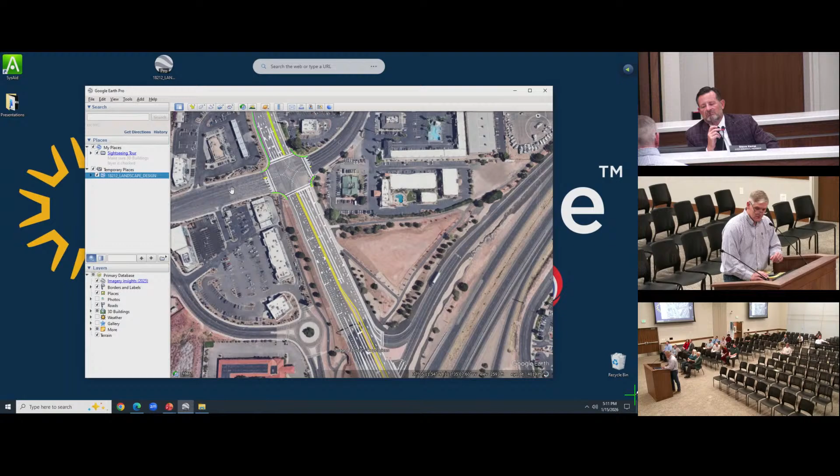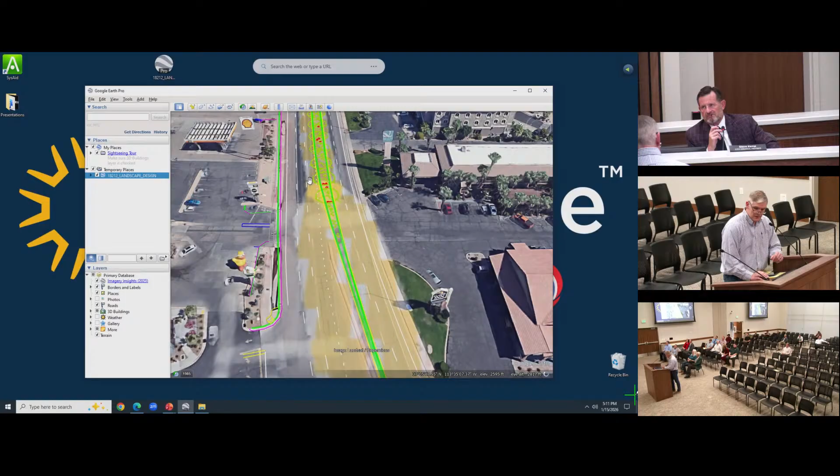I have it here — so this will be Main Street and Bluff, and I'll try and go up the road a little bit. This green is the median, and the yellow striping right next to it. You can see where these are supposed to be trees on this section of the landscaped median. And then as it gets further, I have the roadways turned on.

You do have bushes, and then it opens up again at this intersection. This will be, I think the signal is at 900 South — this might be 950 South.

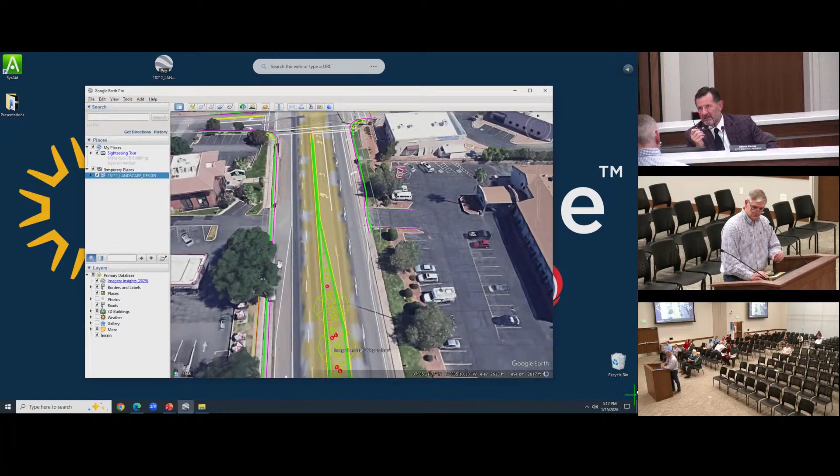And then it opens up again for the traffic signal. Can you stop right there and back up a little bit? Sure. So effectively, for that whole block between 900 and 800, or close to it, maybe.

The signal's 900. So then it's south. And then the 950. So probably from 950, that intersection you've got your mouse on, all the way up to 900, there will be no access northbound to any of those businesses on the west side.

Correct. It would be right in, right out through that area. They can get through the parking lot and get up to the traffic signal. I've done that quite a bit. But correct, there's no left in or left out right there on Bluff Street.

And I assume that all those trees right there in front of those businesses are going to be taken out. I believe these trees were being impacted, yes. They are? I thought they were staying. No. From the meeting where they came and spoke with council about reducing the amount they were going to on the curbing, they took that information and moved forward with that.

Did we have conversations about what the pedestrian access along here would be, whether it was a widened sidewalk or a path? It is a sidewalk. Okay, it is a sidewalk. We did remove the trail so that we didn't take out as many trees.

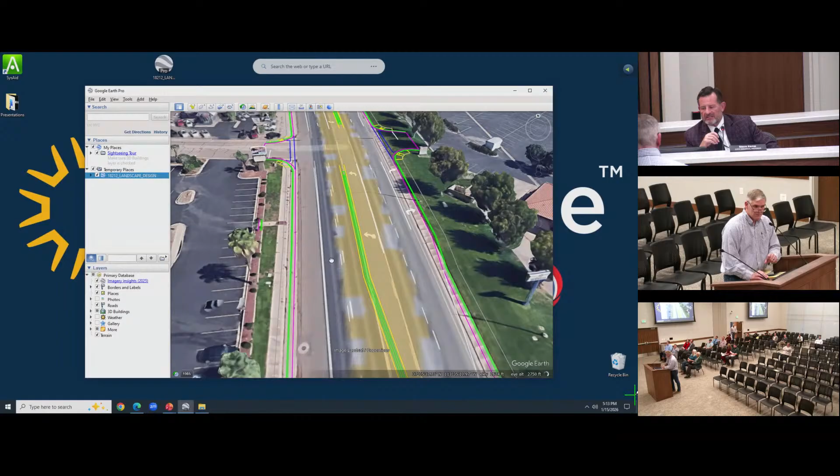We don't have any landscaping in this section. But it is still a raised median. It is a median, yes. Thank you. And then you get to, I think this is 850 south.

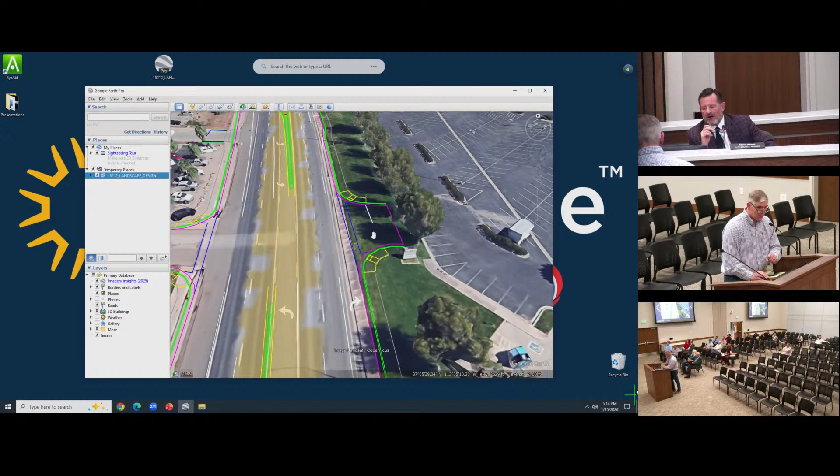It opens up. This is a potential driveway that they told the developer you can put a driveway in. You can? I don't think they have, but that was a potential driveway that they could put in. But I don't believe they have.

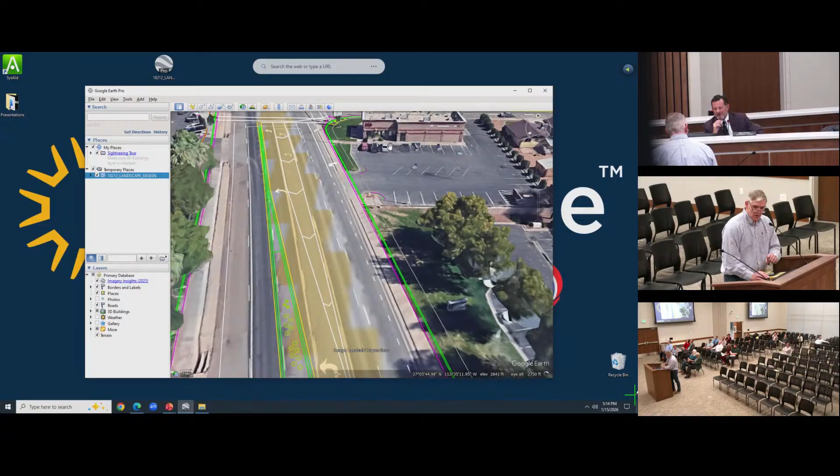And then you've got some landscaping here. This is just below Arby's. It's Arby's, yeah. And then it opens back up.

So effectively, that large St. George Place project will have one intersection that is fully functioning, that being that one right there at 900. Correct. Unless they chose to put another driveway in. Thank you.

So just to clarify, if you want to visit one of the businesses on the west side and you're traveling north on Bluff Street, your option is to flip a U-turn somewhere. Is that going to be allowed to come back to those businesses? They have not told us that they were limiting or eliminating U-turns.

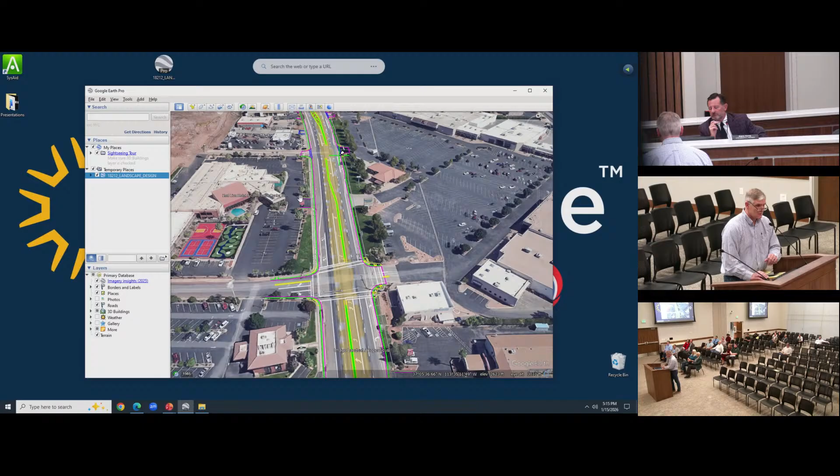But then right now we see on River Road where Sprouts is, people are coming almost up to the boulders and flipping a U-turn, which is another traffic hazard right there by Bundy Lane.

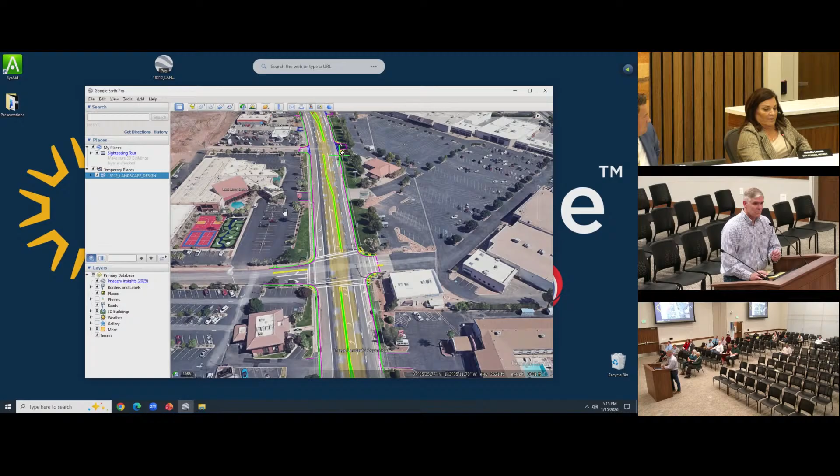Maybe the question I have is, after the meeting, can you provide the council members with a contact at UDOT for where they should have people send their public comments and concerns? Because I've fielded a ton of them, and I know other council members have as well. It sounds like UDOT is coordinating with your office, but they're not listening to the residents, and I want to be able to tell them who to talk to.

Yeah, okay, thank you, Cameron. Well, sitting in those meetings with UDOT, I do think they made quite a few concessions and tried really hard to work with us on this, while also preserving safety.

But I do think that we should ask them to look at the pedestrian flow now that the road is open up to Tech Ridge, just because that was part of the conversation. If we remove the trail, how are people going to be able to come down off Tech Ridge and access those businesses? And now that that trail from Tech Ridge is open down that new road, I think most people are actually going to want to use 900.

It's what makes most sense. If you're coming down off of there, walking, you're going to want to come down 900 and access those businesses, whether you're on a bike or on foot. So just having them make sure that that pedestrian flow is good, because that's part of Tech Ridge's whole goal, is to have people use their car less.

So, sure, and I just want to make sure I understand correctly. So we as the council will have no input as far as the actual approval when they do finalize these plans, other than behind the scenes being an advocate for those businesses and residents, and having residents contact UDOT directly. Outside of that, we don't have a lot of decision-making authority. Is that accurate? Correct. Okay.

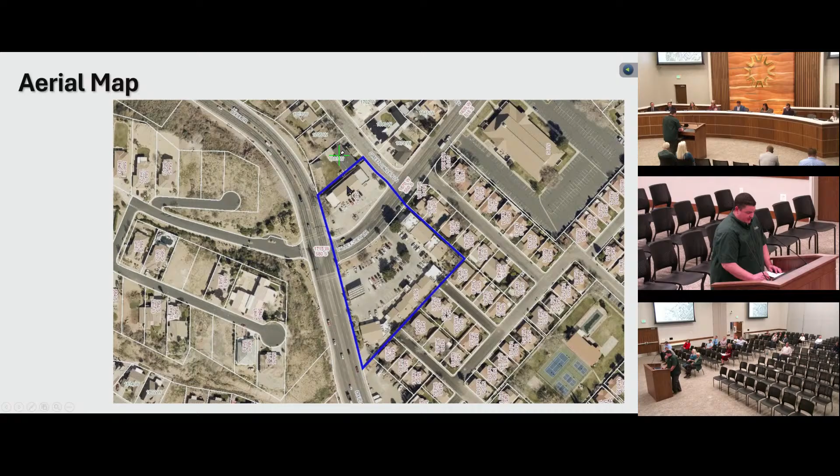And Brian will present this item. Good evening, Mayor and Council. So just as John said, this is the Green Valley Mall and Professional Plaza, again at the corner, both corners of Valley View Drive and Dixie Drive. Professional Plaza is on the north side of Valley View Drive, and then the Green Valley Mall on the south side. Current land use is commercial.

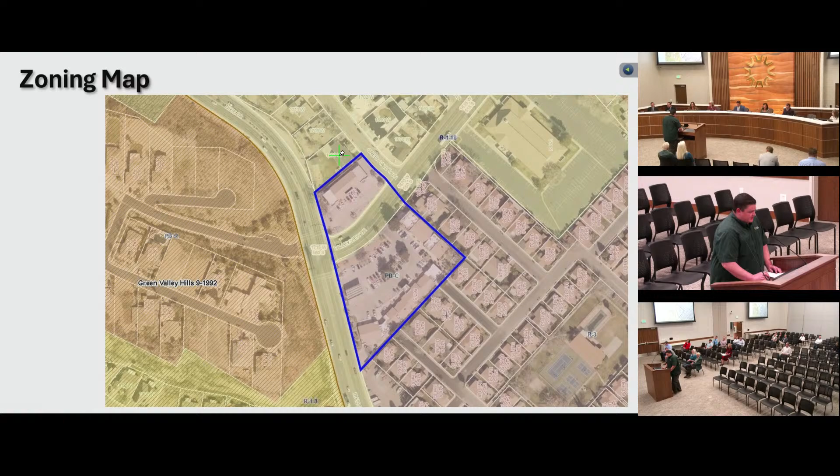Current zoning is PDC. This PDC was originally approved in 1984 with the approved use list of the AP use list. Just a reminder, the AP and C1 categories are usually much smaller commercial developments, usually surrounded by residential zones, trying to limit the impact on those residential zones while also providing conveniences and other services. So again, 1984, this AP use list.

Later in May of '85, the commercial C1 use was added to the use list. And then the applicant is proposing these 3 retail uses: antique shop, used furniture, and thrift shop/secondhand store/consignment, with no storage or deliveries outside of business hours.

With that, I can answer any questions that you may have, and one of the owners and the applicant is here as well, if you have any questions for them.

Brian, that was my question. I did some research on the ownership of this property, and it doesn't look like the applicant, Old Gold Enterprises, is either of the owners. Is this a tenant? Yes, it's going to be one of the tenants that's making the application. Do they have the approval of the owner?

Yeah, they've talked to both owners, both for the Professional Plaza and the Green Valley Mall. They were both involved as to what was going to be added on the use list. Yeah, they kind of know what's going on. I noticed that it was all owned by the Lemleys at one time, and then they sold the larger section to a group out of California.

The other question is, there's quite a few little shops in that area. I drive by it every day. Why, now knowing that it's a tenant that was the applicant, that all they wanted to do is make sure that their use got added - I think that in the future we may want to look at, if we're going to do these amendments to these PDCs, maybe adding a few more uses, because I know that center has struggled only being able to do restaurants and that very small list, and those types of neighborhood uses are needed in that area, as this is one of the few commercial nodes on the west side.

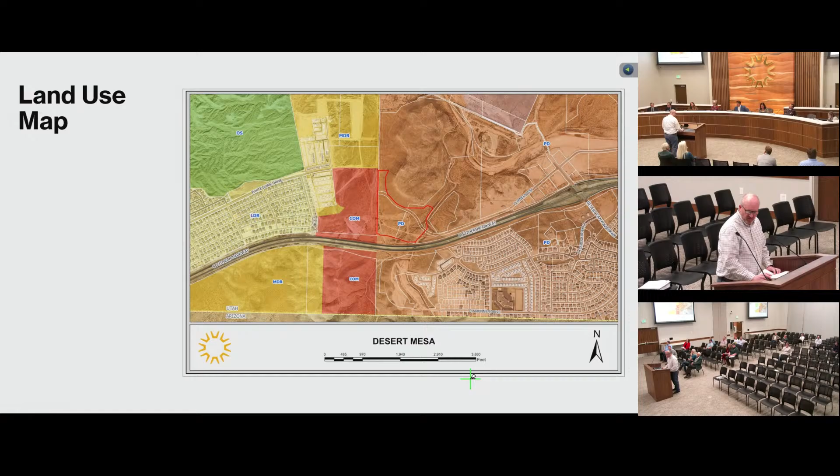Yes, this is the location. You see Southern Parkway here on the map, outlined in red are the properties. Land use is part of the Desert Canyons PD, and then the zoning map shows the various zoning that they are currently zoned: the AVI, the ASBP, and the open space.

They are currently in the middle of building Flowers Way, and that is going right through these properties. In fact, isolating a piece of this open space, but also kind of creating what would appear to be a pad that could naturally be used for some sort of construction or building.

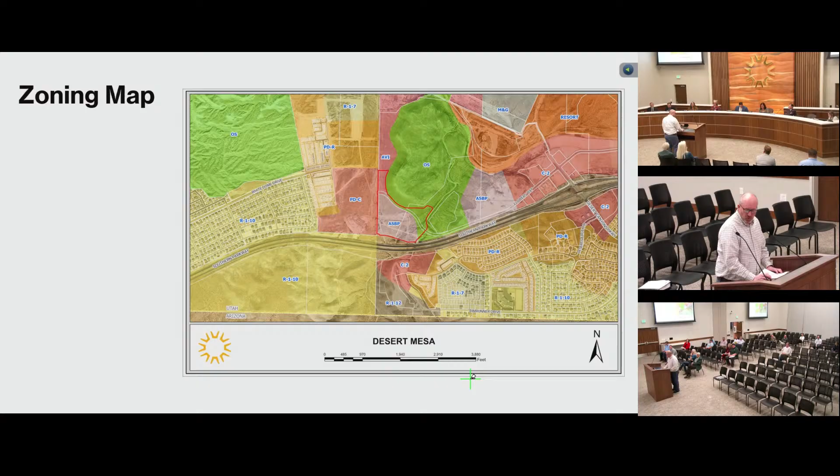So the applicant is proposing that they go to a C2. This would allow them to expand their uses. The ASBP and the AVI are a little more restrictive, and they'd like to just have a little more flexibility. That's why they're asking for this.

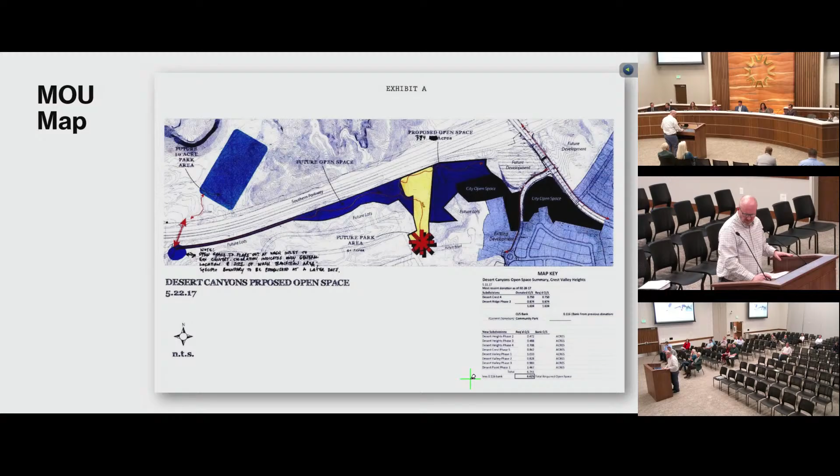One thing, with a lot of maps in here, that we wanted to make sure of is that if that open space is taken away, we're not taking something that was required through either their development agreement or their zone plan, because they are required to dedicate or set aside a certain amount of open space with each project that they do.

So if you have a single family development, that requires them to set aside some open space. So we want to make sure that if we took that open space away here, that would not reduce them lower than what they are required to give. So we went through that analysis, sat down with the applicant and their zone plan.

We looked with our legal team, and where we landed was that they are actually approximately, as of the last time that they donated, almost 31 acres over what they're required to give. So by removing this 3 or so acres, they would not dip below that required open space that they're required to have. So just wanted to make sure that was understood.

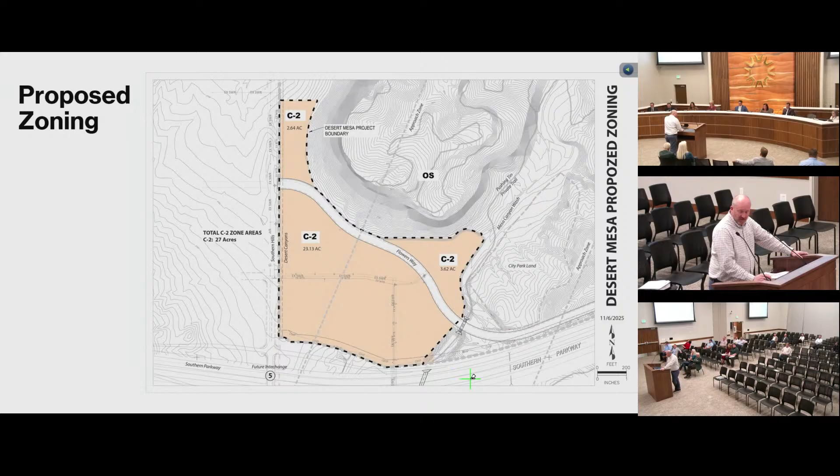And again, this is the applicant submitted this. This is the current zoning, and this is what they are proposing to go to C2 on all 3 of those pieces that the Flowers Way would bisect. So with that, the Planning Commission held a public hearing, and they recommend approval with a 6-0 vote. If you have any questions, the applicant is here, or I can try to answer those as well.

I guess my question is, so in the narrative it said they were trading the open space. Yeah. So that's not the case anymore, because you're saying they're 30 acres over on their open space—or are they still trading it?

So when we go back to this slide, they will need to reduce that 30.772 by that 3 or so acres that they are taking out of their open space. So it's not a trade, it's just reducing. Right, okay, that's exactly fine. I just wanted to make sure that we have that correct, because the narrative does say they're trading it.

Okay. I have a question for Dan. One of the items in the C2 zone is it automatically has an allowable height of 50 feet for facilities.

This piece of property is in direct line of the airport approach or takeoff, and I wanted to find out if you had done any calculations on the elevation change between these parcels on both sides of Flowers Way and the runway, and have you had any conversations with Dustin to make sure we're in compliance with the FAA?

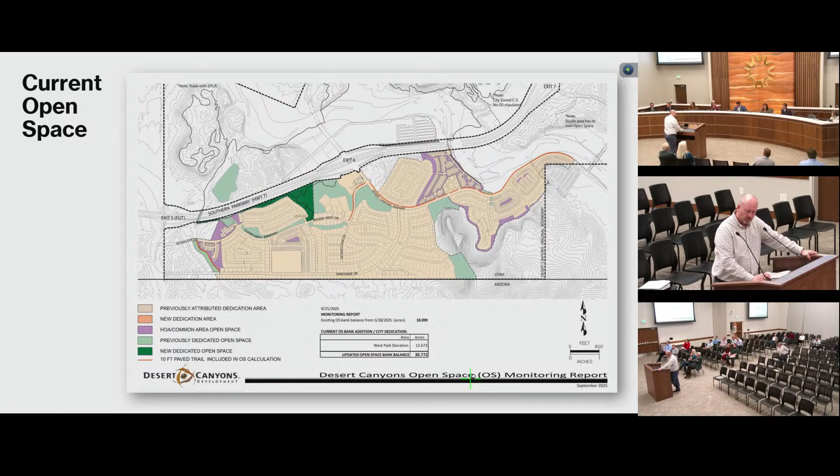So we did look at that, and we did talk to Dustin because there was some concern would that be too high, and after we went back and forth, Dustin felt like it wouldn't interfere with the airport's requirements and so forth. So, do you know how much elevation change there is? I can see the rings on the topo map, but they're too small to count. Have any idea what the elevation is? Maybe that's something the applicant can answer if you can't.

Yeah, he might be able to answer a little better, but let me show you this right here. That's kind of a bluff, and there's some biking trails up there and so forth. So this is at the bottom of that, and I believe, and maybe Kurt can add on to this, any building which could go up to 50 feet would sit below that bluff, I believe. But if you want to, that's off there.

Mayor and Council, Kurt Gordon with Desert Canyons. So the area that we're talking about, the closest to the runway, is about 1.25 miles south of the runway, and it's roughly 100 feet below the elevation of the runway. And so if you put together the conical surface, which is 1 foot in elevation per 100 feet that the FAA would allow you to build, you would have to have a 150-foot tall building in this area.

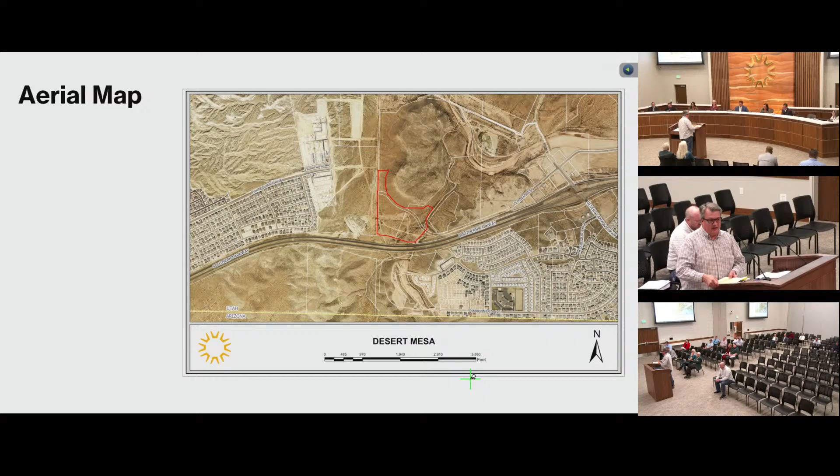Before you would violate FAA, before you'd have to go talk to the FAA. So we don't have any plans like that. Thank you, I just want to make sure we had looked into that. Thank you, Kurt.

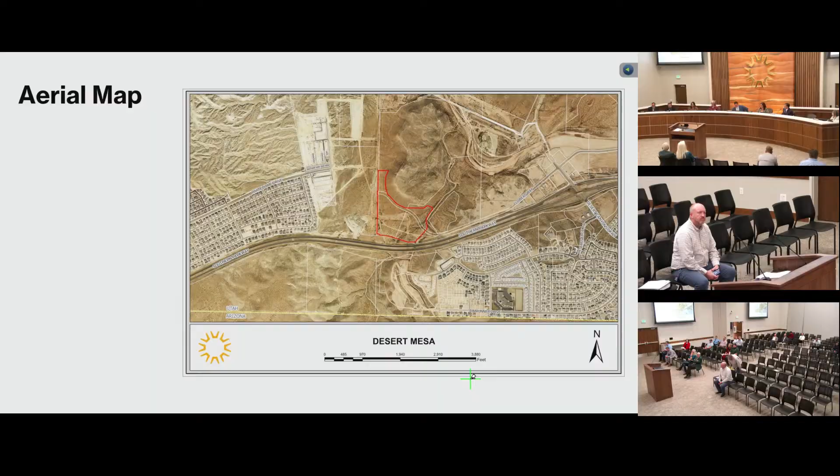Any other questions? No. If there's no other questions, I'll entertain a motion. I'll make a motion to approve.

We're on number 6, right? Ordinance 2026-002, amending the city zoning map by changing the zone from AV airport vicinity industrial, airport supporting business park, and open space to C2 highway commercial on approximately 27 acres, generally located directly north of the Southern Parkway at approximately 2600 East, with recommendations by staff that he'll need to submit a fully designed site plan and comply with all the requirements of C2 zoning at the time of development.

I'll second the motion, but I do have some discussion. Well, last item, the top of that mesa that Kurt just mentioned, it's a mountain bike trail, I believe. I can't remember the name of it. Pushing 10, yes. How will this development ultimately impact that mountain bike trail, if at all? And will it benefit or hurt that?

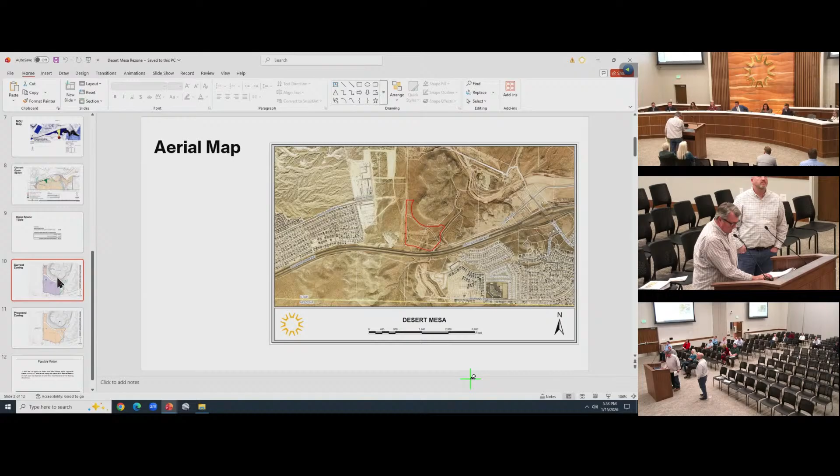Let's go. So you can see that the mountain bike trail basically follows the wash that's to the east of the OS zone right there, and that'll stay in place. We've actually built under Flowers Way a culvert that's big enough, it's 9 feet tall. So that trail will continue and connect on to that Pushing 10 open space trail.

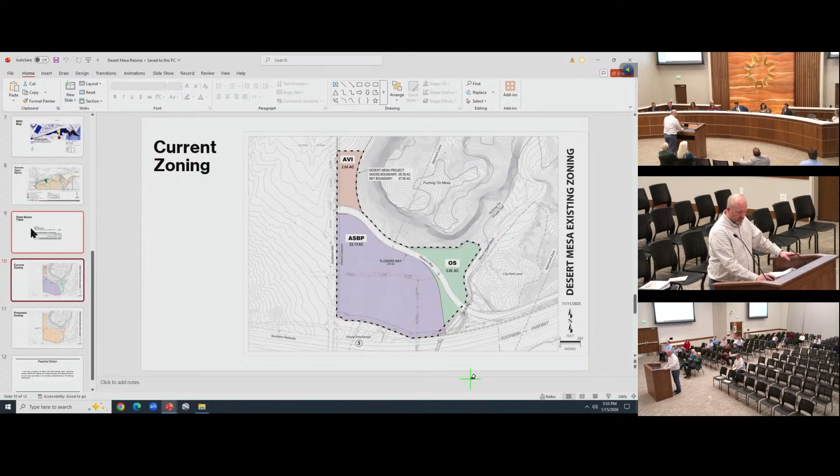Great, I appreciate that. I know that mountain bike trail was built at significant expense by, I believe, Desert Canyons, so wouldn't want to see that go away. I'm fine with it, I've seconded the motion. Any further discussion? If not, we have a motion by Natalie and a second by Steve.

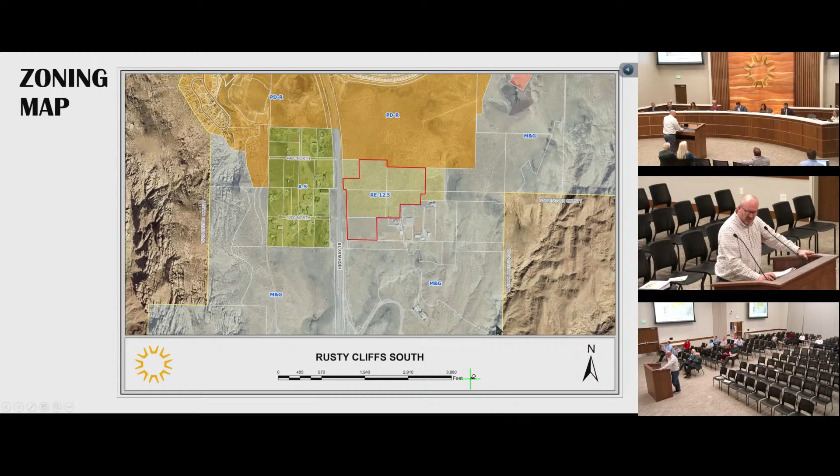The zoning map calls for RE 12.5 and gravel and grazing. It says M&G, but I think that's a carryover from an old designation. It's gravel and grazing.

One thing with the PD-TNZ, which I should explain, we only have one of in town actually, and it is Desert Color. And so this isn't Desert Color, but it has some of the same elements that Desert Color was required to comply with.

One of which is that there's two subcategories of this zone. There's an NG subcategory and an NE, which means neighborhood general or neighborhood edge, sorry. They have opted to go for the neighborhood general over the entire property.

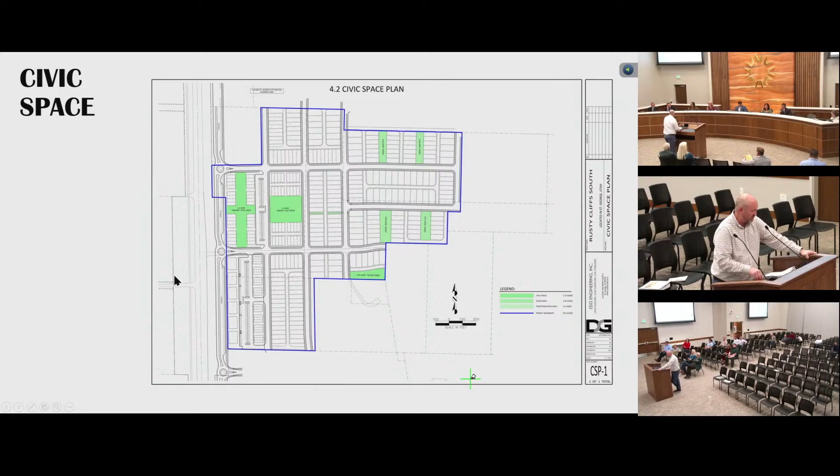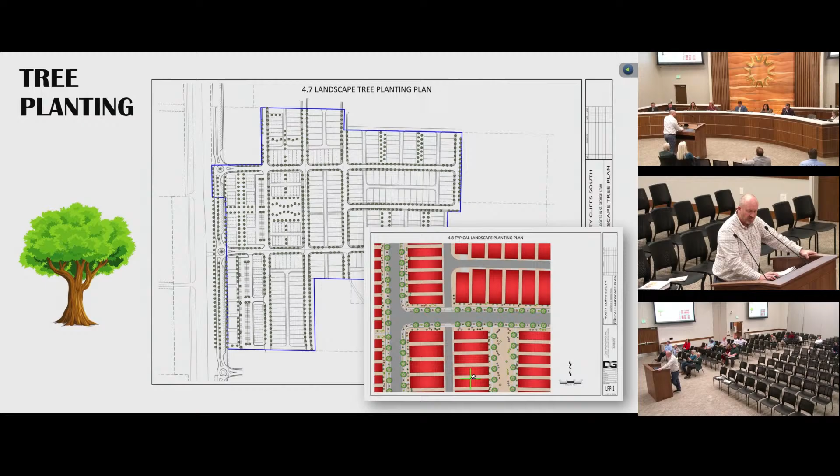Zoning code requirements. So there's two things that we looked at with this project: TNZ design guidelines. There's actually a manual that was produced that kind of guides how the project will develop, and then there's also the zoning code. So that zoning code states that they need to meet not only the zoning guidelines but also the design manual.

So they've gone through, and in your packet was their zone plan that they're proposing, and as we've looked at the zoning code requirements, it appears to meet all of the requirements therein. We've talked about most of these, the mix of forms, the NE civic and the NG civic space, and the integration of how it will integrate with properties around it.

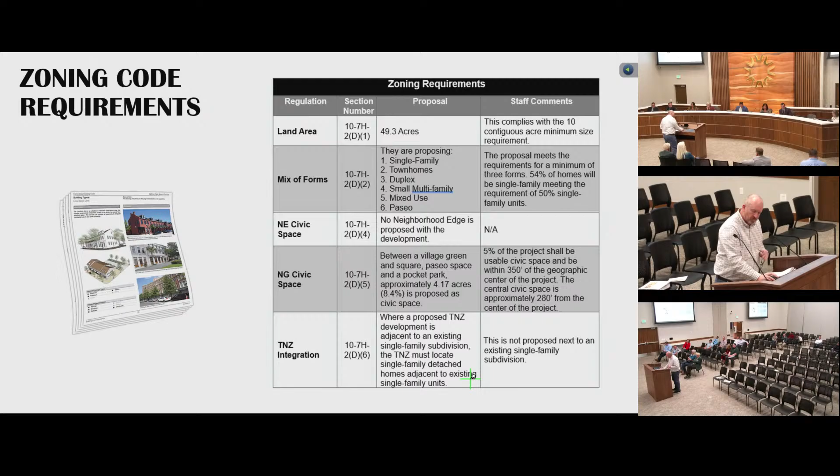And then this is the architectural design guidelines. I won't go through every one of these, but just know that we've gone through these. We want to make sure that all of these are being complied with. And they have, again, in their zone plan outlined guideline by guideline how they will comply with all these standards.

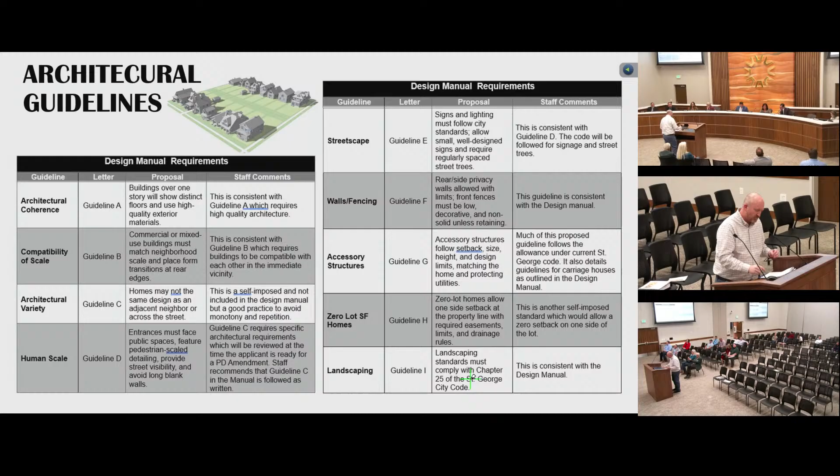We want to have things that will slow traffic down, one of those being on-street parking. So that is unique to the PD-TNZ zone. We typically don't allow to count for on-street parking, but in this... Can I interrupt you for a minute, Dan? Yes, sir. I looked through the packet, and there was the road width. The width of these roads, I couldn't get clarity on that.

Are you going to be covering that in another part of your presentation? I hadn't, and Wes, did you want to talk about that a little bit? The road widths? I did meet with Development Solutions. We went over the road layouts to make sure, because the property to the south has submitted a plan we've looked at and their road layout, so we wanted to make sure the two are going to interface together.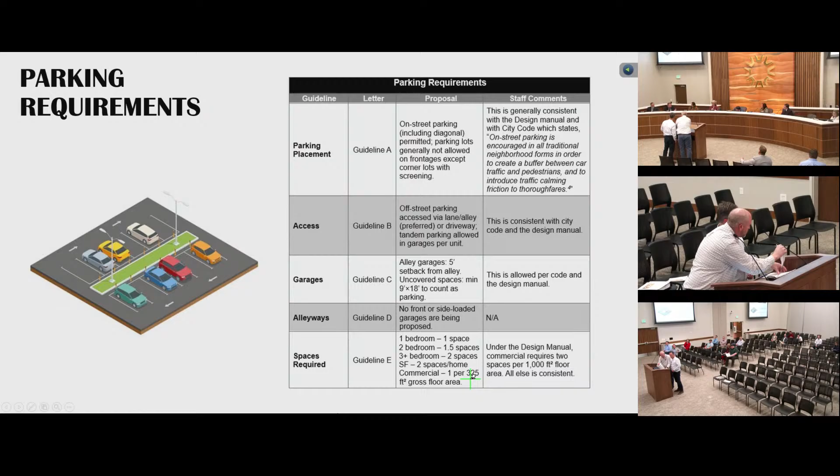Correct. So in the TNZ, in the design manual, there's a specific road width that is different than what our code requires. In a residential road, there's a 55-foot residential right of way, but the cross section is 14 feet and 14 feet, so you actually have 28 feet of asphalt, curb, gutter, planter, and sidewalk. Your cross section in a TNZ is different than other code because the idea is you're going to have narrow streets, slow down traffic, which encourages safe pedestrian walking. So the TNZ is just a different type of project than what you see in other areas.

Which I encourage, and I'm excited again for this. But if you've got 20 feet of asphalt and you've got on-street parking, you're going to lose at least 15 feet - you're going to have a 5-foot section of asphalt left. No, so in your 55-foot local residential street, and it depends on the classifications, you're going to have 28 feet of asphalt, and if you have parking on each side, what's the parking?

You figure 8 feet, and so then you're going to have whatever the remaining is of 28 minus 16... west, 12 feet of drive aisle between the two, so two cars couldn't pass.

It would be, and I'm okay with the concept of what's going on here. I just want to, I know that we've got right adjacent to this property to the south, we've got some large property owners who have arenas, big horse trailers and big dualies and other things like that. And this is going to be their only access to their property, because the road that's already there is going to be absorbed into this project. And so that's your local residential street. There's a whole other segment of different roadways, so it depends on how that's classified on what the width's going to be.

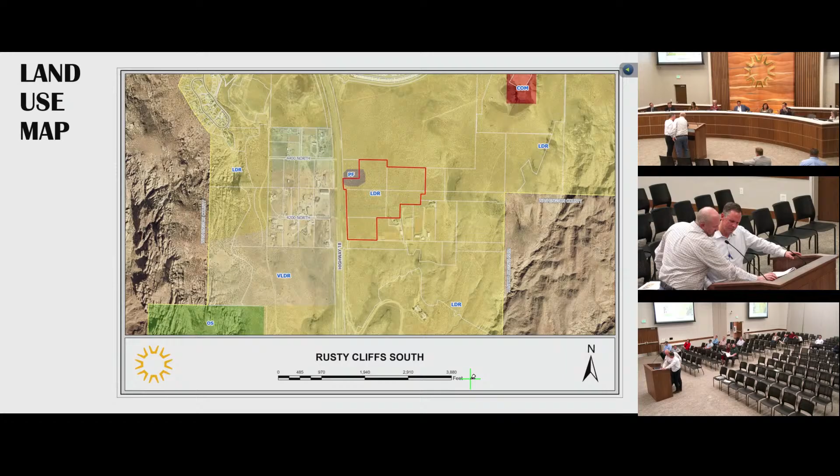But there's already an existing road, I think it's even labeled 4230 north, that comes off and goes to these other properties, and maintaining that access so that they're able to access those 3 or 4 parcels that they have, their residential homes, that they live there and they use those. My only concern is that we're not cutting off or so severely limiting their ability to get down that road that they have.

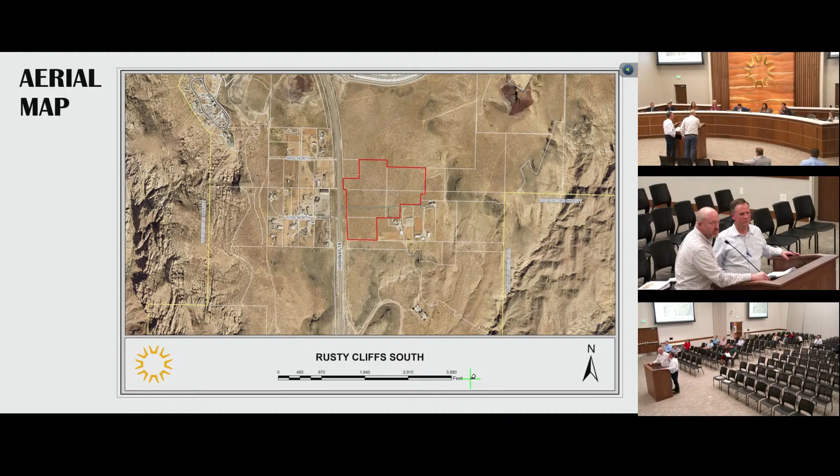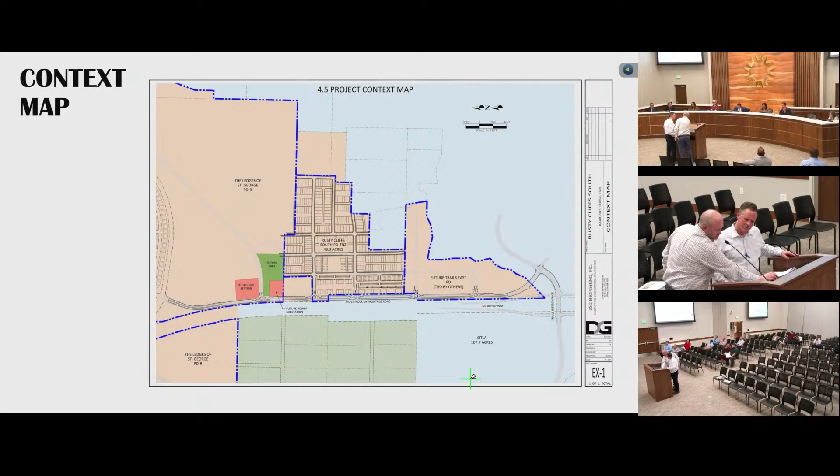If we're only talking about 12 feet total, was that right? If we, what was it, 28 minus 12 or 28 minus 16? So 12 feet total.

And that neighbor actually came to the public hearing, the one that lives here, and voiced that same concern. And I don't want to put words in the applicant's mouth. He's here if he wants to speak, I'd love to hear from the applicant about what they see here, because I have one other question and I'm sorry for interrupting your presentation. This was the only fly in the ointment to me, so that's why I did.

No problem. The other concern was the road adjacent to that property going to the south. Is it the intention that they're going to put in the full road width and then have a small narrow strip of property that they own to the east of that road? Right.

I just want to, maybe these are applicant questions, so I'll let you finish your presentation and then we can ask those. Sure. And I won't take too much more time.

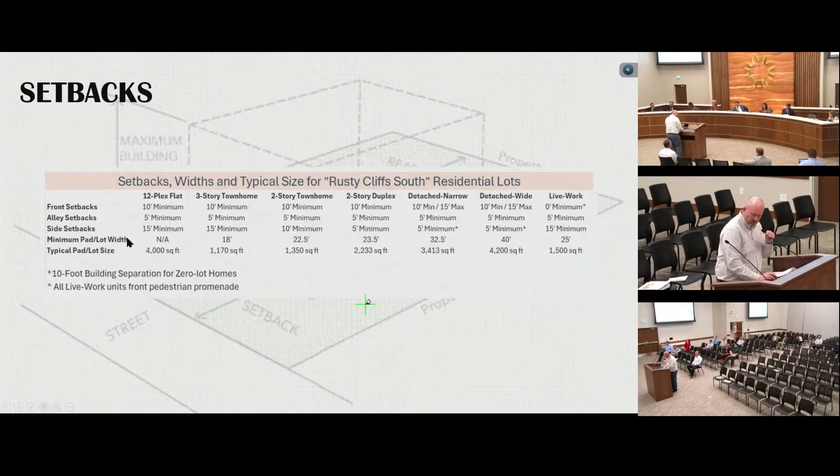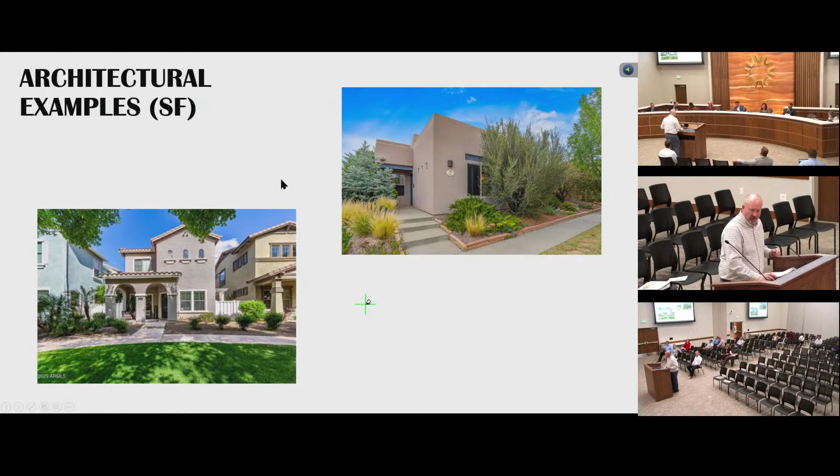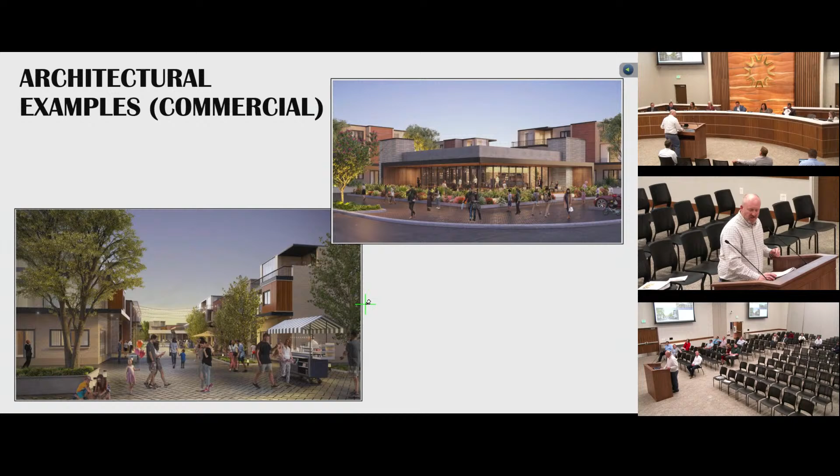These are just some examples that they put in their zone plan of what they felt like they could, what they wanted to provide. These won't be exact, but it gives you a kind of a flavor of the type of housing that will go in there. And then the attached townhomes, small scale multifamily, and then some details on the commercial as well.

So with the recommendation, the Planning Commission recommends approval of the application for Rusty Cliffs South zone change with these conditions: that the number of units associated with the project is limited to 380 as shown, that there's a preliminary plat submitted for review and approval, that any units or group of units that are not single family will have to come back for your review as a PD amendment.

Dan, can I ask you a question on that one in particular? Yes, please. Why is that necessary? That seems redundant. Typically when we get a PD, we have full elevations, drawings, that kind of thing, and we don't have that with this. So just like Desert Color, they come back with pretty much any neighborhood that has any sort of multifamily element to it, same idea. But isn't that already in our code? If you're building a TNZ neighborhood, why do we need to add that?

It's just redundant, is all I'm saying. I would agree with that. We specifically mentioned in the different sections of the TNZ zone what we're looking for, that we can control mass and scale and those kind of things.

If you're comfortable with them working with staff on those kind of things, and us making sure all the guidelines are being met, and they commit to that, that's certainly something you can do. I just think one of our goals has been to reduce redundancy and additional reviews on top of reviews if they're not necessary. Where we've already got the TNZ spelled out so distinctly, it doesn't make sense to me to add an additional redundancy to make it more complicated for the developer.

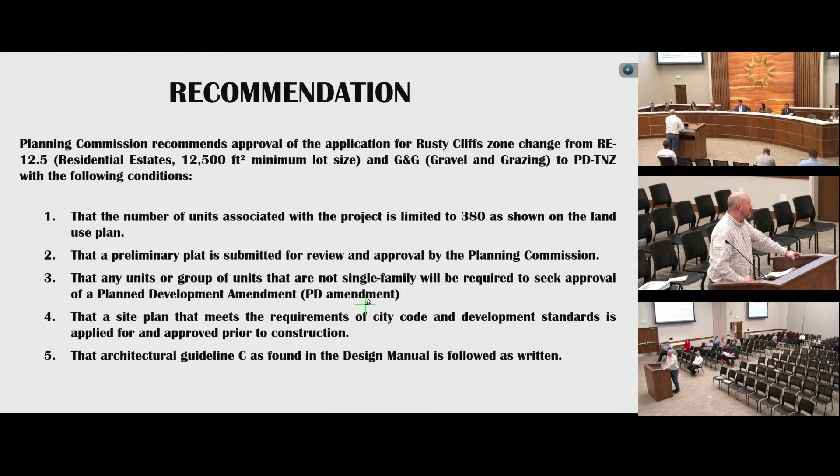Now we have this concept landscape and site plan. What we don't have, the only thing we're really missing here are the elevations. But that is in the PD, that is a requirement of the PD. Has the applicant given us a sample of what the elevations would be, and would that suffice to meet that requirement? These are the samples that they gave us.

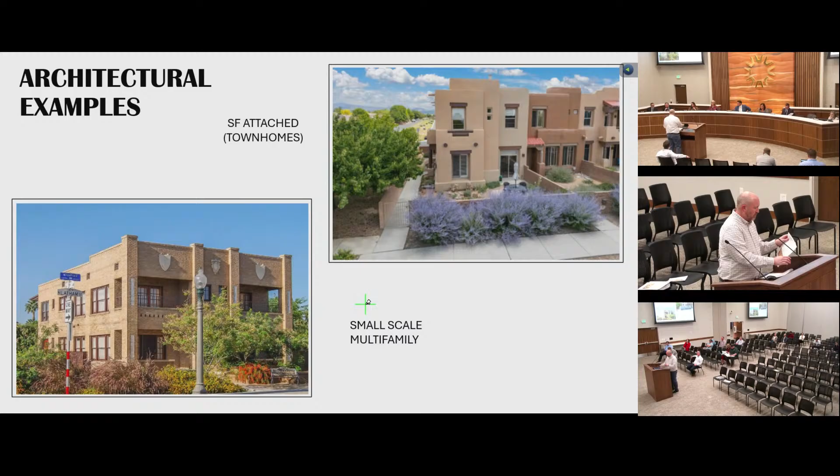I'm trying to remember - question to the applicant, would they be comfortable, and I'm assuming they're not, being comfortable with these elevations being applied across the project. That's what I assumed. Okay.

Well, maybe I'm not stating my point effectively, but to me, we created the TNZ zone so it would speed up these processes, right? So people could do creative things, and we also want to speed up the processes. So adding that additional review just seems redundant to me.

Yeah, and with these example elevations, I'm trying to think, is there a way this could suffice that requirement in the code? Looking at the applicant nodding his head, I think he'd be concerned with being limited to these specific elevations to meet the code.

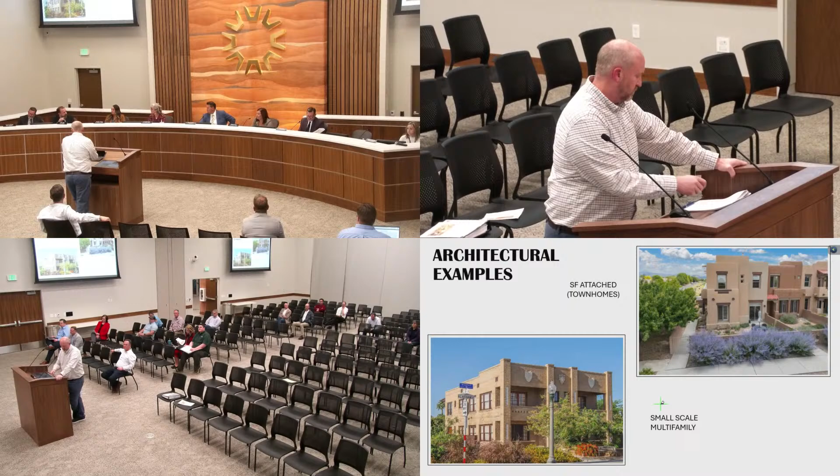Basically, maybe I'm not understanding, because I think they would have had to come back anyway, the way it's written in our code. Correct, so the code requires all the elevations to be approved. They did submit some sample elevations. I think if the applicant was okay building to these sample elevations, you can make an argument that it met that portion of the PD ordinance.

But if they're not completely satisfied with those examples, unless I'm misspeaking, Stacy, then he'd have to come back and get additional elevations approved. But Planning Commission added this as an additional requirement when it's already part of the code. So why do we have to have that added as an additional requirement? I don't think the code needs to be clarified as part of a condition, because they're required to comply with the code regardless of whether that condition was in place. So that could be removed.

So back to the road, do we ever determine what the width of the road was? Based on what I was provided, it looks like it's 55 feet, the residential street section, with 28 feet of asphalt total. Is that correct? Yeah, that is the road that will replace the existing road 4230 north that comes directly off the roundabout. The roundabout is what comes off the frontage road. Am I stating that correctly?

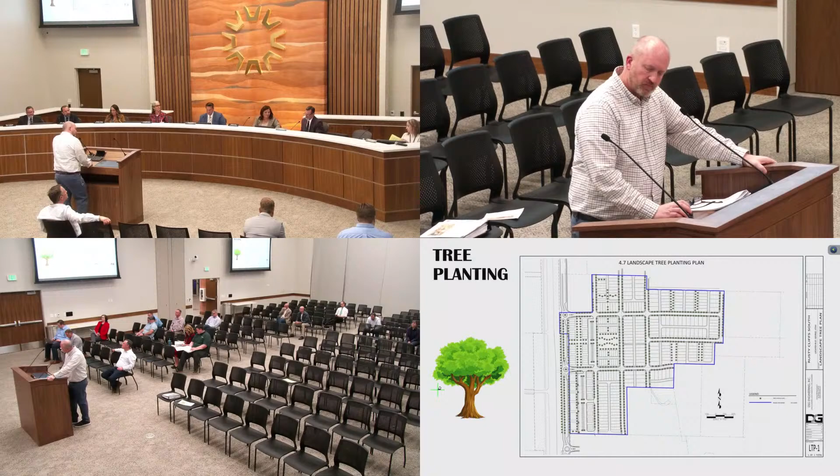Yeah, and we would have that same road width on the road that right now they've got a little strip of asphalt that comes south. That road that effectively lines up with that would also be 28 feet total of asphalt, with the ability to park cars on both sides, on-street parking. There could be areas right around here that we don't allow parking in that exact area.

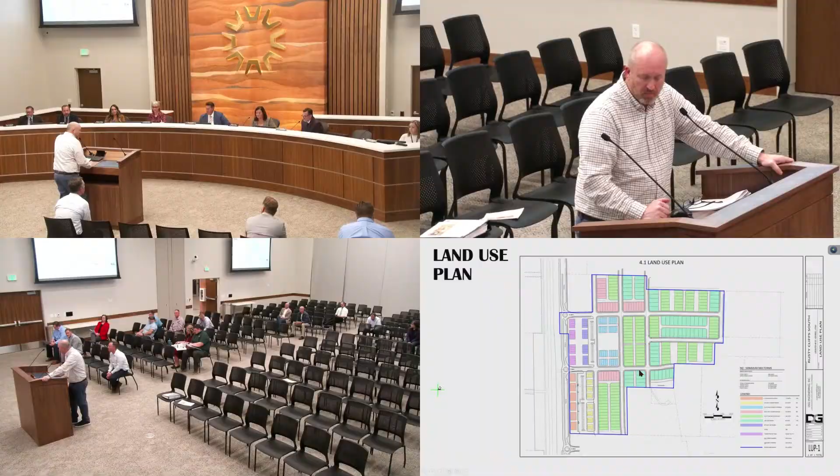Steve, what if you made part of the motion that on that particular street, because it's access for those lots and it's peculiar, there's parking on only one side of the street through that section. They have to sign it. You could make that a condition, that they can only park on one side of the street?

Yeah, or there's just no parking in this intersection, and we can work with the applicant. Will that work, because we are including on-street parking, will that work for the applicant?

I think that'd be hard for us to enforce in a residential neighborhood to have no parking for single family, on one side. Because it'd be like having a red curb in front of your house. I think that'd be probably difficult.

Can we do it around the actual intersection? That's where you're going to have the biggest issue with things like horse trailers and other types of trailers. We do that downtown on intersections, and that'd be easier to enforce. Usually it's 20 feet from a stop sign anyways where you're not able to park, so that may naturally make it easier to ensure the sweep is correct on that intersection than it would be to limit the parking.

Okay, yeah, that was my original intention, was just around that curve on that one particular intersection. In this case, it's where the road curves and comes to the south. It only affects one lot on the east side of the road.

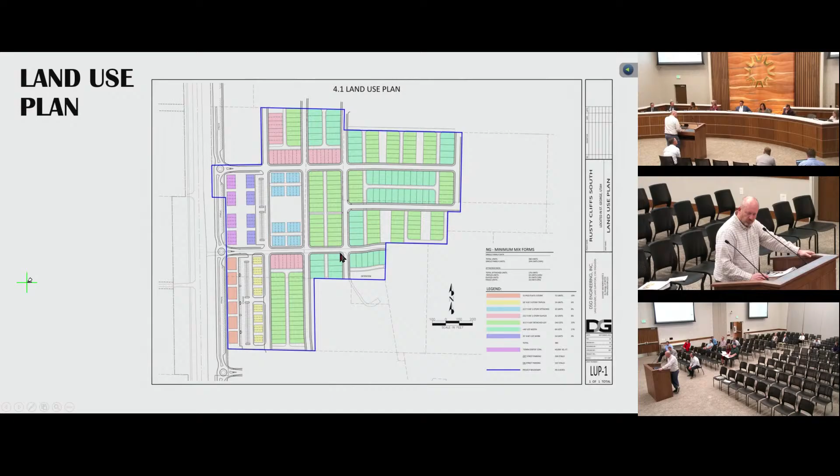The applicant may have something to say about that as well. You want to come up? He's been itching to the whole time, I know. Come on up, Stacy.

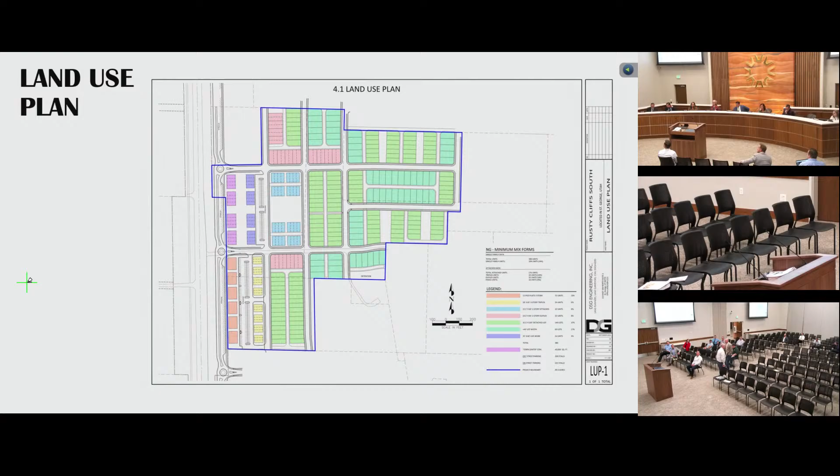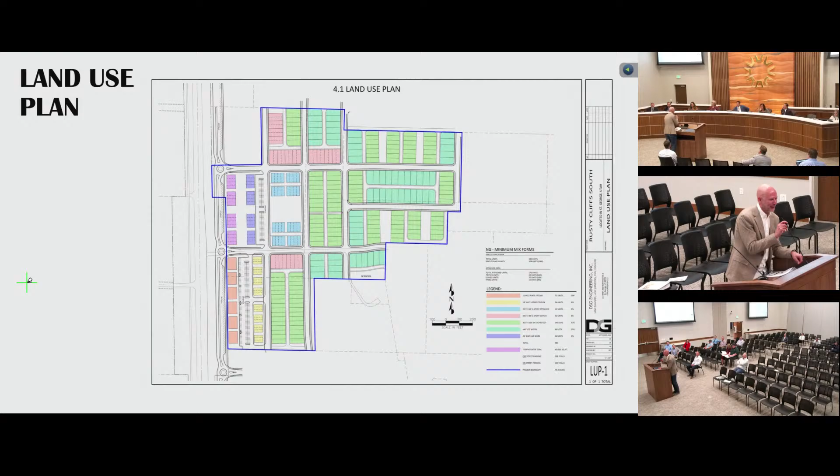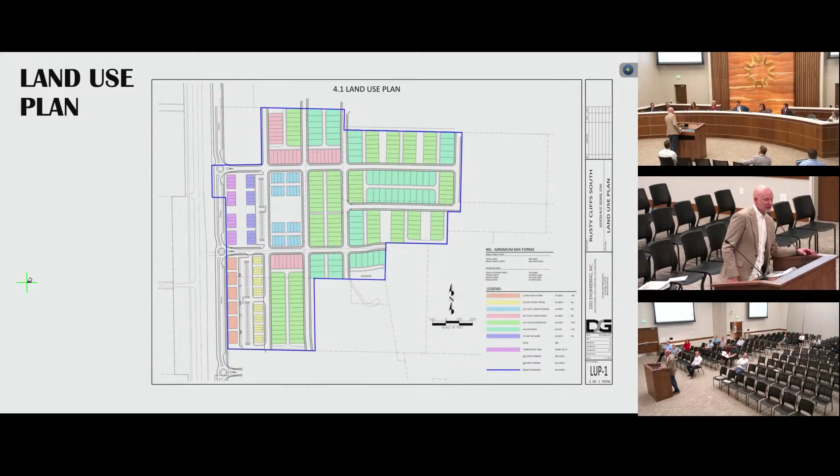Yeah, you guys know me, Stacy Young, representing this item, and I love to hear myself speak, you guys know that. I think we'd be absolutely happy to prohibit parking on as much of this as you're comfortable with. In this type of neighborhood, we welcome on-street parking, but in fact I don't think it's going to be heavily utilized. We'll still be providing a ton of off-street parking with the alley-loaded garages and so forth. So it's not going to be in high demand, and if it will make you more comfortable to remove some, that won't be a problem.

Does it make sense what I'm saying, that with 28 feet of asphalt, and you lose 16 of those feet to parking on either side, you're looking at a 12-foot piece of asphalt that you'll actually be guaranteed access to drive down at any particular time? And that being a concern to the rest of the project, these people know what they're getting into. But given that there's already an existing road there and we're going to be absorbing that road into the project, I appreciate that you've designed it in such a way to give access to those parcels and maintain that access for those individuals.

I think there's only 3 homes, correct? 3 landowners, yeah. In fact, I think there's actually only 2 homes, the rest are just arenas. I thought the third might be parcel 3 had a home on it. Yeah, though you might be right. I don't know how to work your new tech here, but anyway, yeah, I think the rest are just arenas.

And then when these people, who knows when the next generation, what's going to happen to that roughly 20, maybe 25 acres that's sitting there, wedged in between your project and the former trails, I don't know what it's being called now, I know another group bought it. So I don't want these people to get stuck and not be able to get out of their properties. I think that's something we can work on for sure.

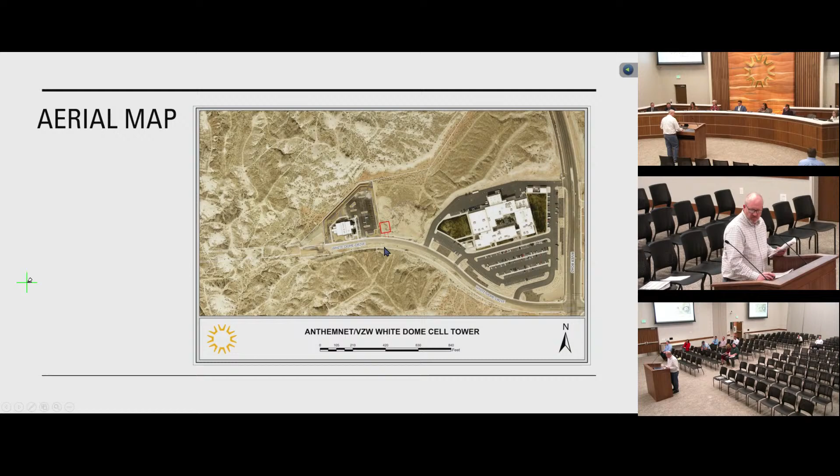This is the site. You have the Career Tech High School here, River Road off to the far right, and White Dome Drive accessing the property right next to the new LDS Seminary building. There's some topography to this—you come up this way, and there's some hillside over here, but this is the 4,000 square feet right next to that seminary building property that they're proposing.

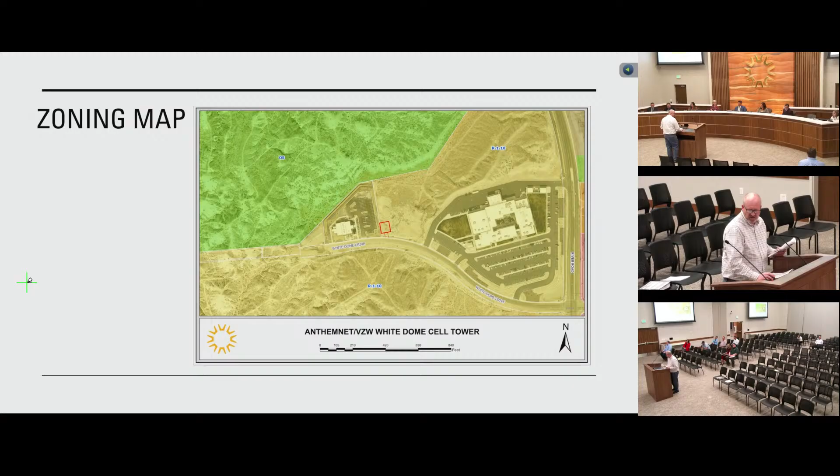The land use map is PD, which I believe is part of the Desert Color PD, and then the R110 zoning map currently. So the reason they are before you is because if they wanted to do a tower 50 feet or less, they wouldn't have to—they could just do that by right. Once you hit that 51st foot up to 100, they have to apply for a conditional use permit.

That gives you the discretion to look at it—are there any conditions? Really, a conditional use permit is a permitted use, but what kinds of conditions need to be appropriate for the site in order to stave off any ill effects that this use might bring. So that's why they're before you. Code requires a conditional use permit. You can see it's in the R110 zone again.

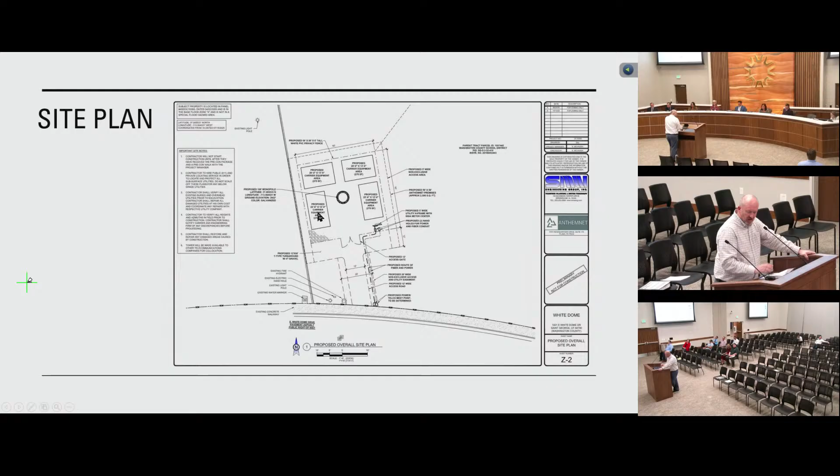This is a look at the site. A closer up version shows the cell tower here. There will be some buildings and areas for equipment as well. 100 feet is what they are proposing. The antenna does go to a little higher height of 105 feet, but the actual tower itself is 100 feet tall.

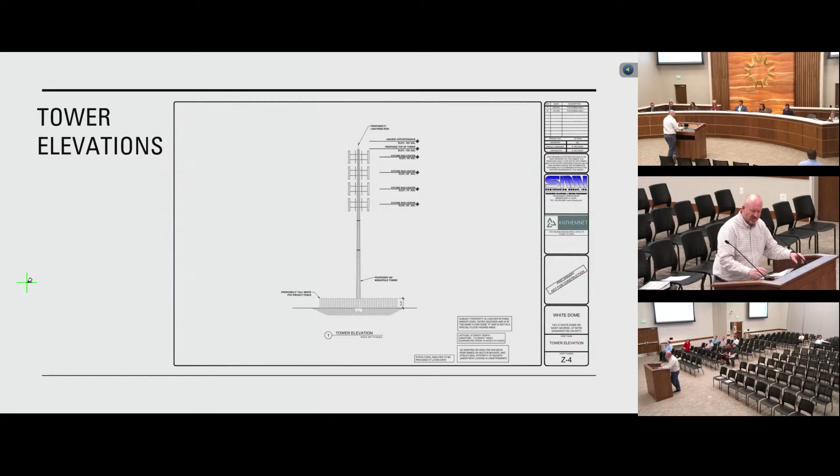They're proposing one of the things we talked about at the Planning Commission—the applicant said they were okay with the change. By the way, the applicant couldn't be here tonight because of a conflict with another site meeting, but wanted to proceed. They're proposing a vinyl fence, but as we know, vinyl fences don't do super well here, so that's why you have a condition that it be a masonry fence—that's actually what's required in the code, a 6 foot high masonry fence around this site. So they were okay with that.

That's one thing to keep in mind as well. This is just a little bit closer look at the proposed tower. There will be co-locating. If you've spent time down in Desert Color, you know that achieving a good signal down there can be a challenge, so this will help with that. It won't take care of it 100%, but the applicant says they have another site in Desert Color they're working on as well to get better coverage of that whole area.

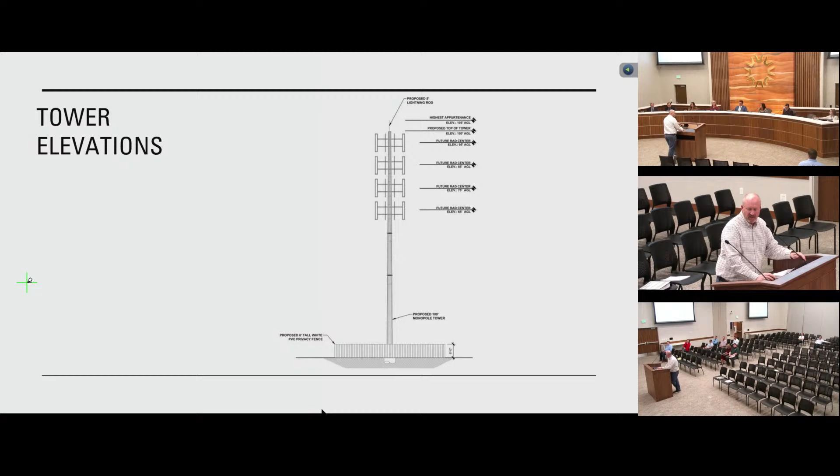And here's that fence that I mentioned as well, so you have conditions. With that, the Planning Commission recommended approval with the conditions.